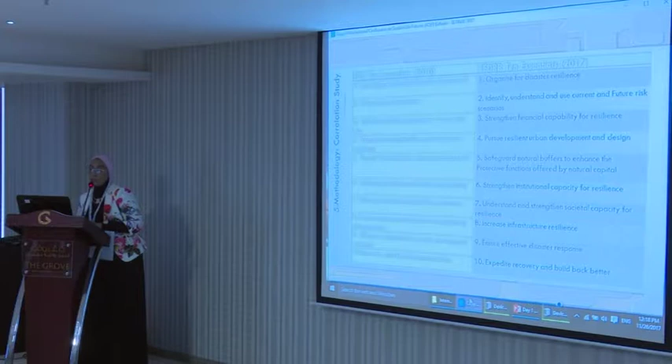From there, I set up a comparison between the new and the old ten essentials. There is no significant change, but there was a lot of emphasis on the use of technology in order to assess risk and develop sustainable futures for cities.

The research finding I acknowledged from those indicators is that this element of sustainability was missing. So once that element of sustainability is missing, that means the Sendai framework cannot achieve its global targets alone.

So building coherence between those global agreements, between Sendai, the SDGs, and the Habitat III New Urban Agenda, is the key element. Here I'm just highlighting one of the targets for SDG 11, which is focusing on reducing the losses, as I mentioned earlier.

And here are some of what we call the metadata, so the processes in order to assess those risks and develop the indicators on it.

I'll end up here with these definitions that I mentioned earlier around resilience: risk management, hazards, resilience, and climate change adaptation.

A very, very quick review here because my time is finishing, but I would say it's evident from the literature review that sustainable recovery from a natural hazard event ensures that existing risks are reduced and any new risks are managed. So the recovery cannot be done just by emergency response, but has to be long term.

Because people who are displaced now are living for long terms in shelters, living for long terms in informal settlements that are not accommodating their needs.

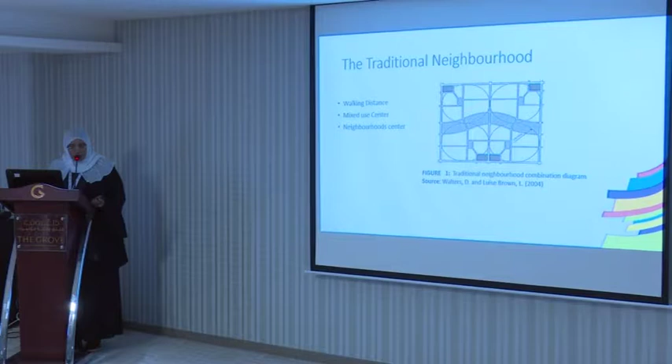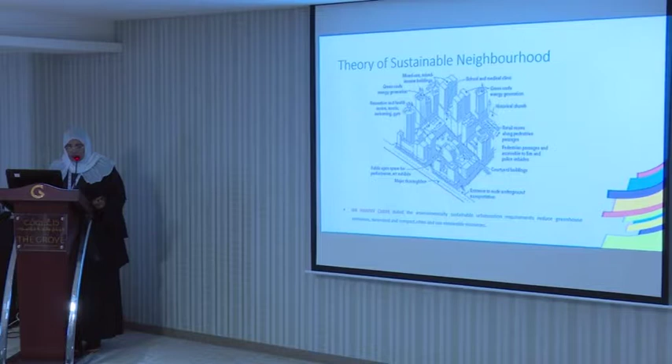Theory of sustainable neighborhood. This design shows us that we can use a green roof, and we can have pedestrian crossings and walkable streets for the neighbors. At the center, available services should include a historical church or mosque available in the neighborhood, retail stores, and everyday activities.

Sustainable cell: this neighborhood is near a farm, so everyday food can be taken from the farm and waste can be dumped there, creating a natural recycling system. The air, CO2, oxygen, and nitrogen can easily be impacted and recycled for the environment.

Focus in Khartoum city environmental factors. Khartoum faces four climates: rainy season and autumn, with precipitation percentages of 50 to 100 millimeters. In summer, the wind direction is north-south, and the temperature in summer ranges from 40 to 50 degrees centigrade, while in winter it ranges from 10 to 25.

Natural resources available in Khartoum: we have solar energy, wind energy, biomass energy, geothermal energy, as well as hydroelectric energy.

Political factors: Sudan has subscribed to several international agreements like Agenda 21 in 1992, and we have UN Habitat, UNEP, United Nations Development Programme, and UNFCCC.

Social factor: early studies showed that Khartoum faced serious environmental problems because of people migrating from south to east and west of Sudan, and this migration has doubled in the last 20 years, creating serious problems for Khartoum's services, education, hospitals, and other activities.

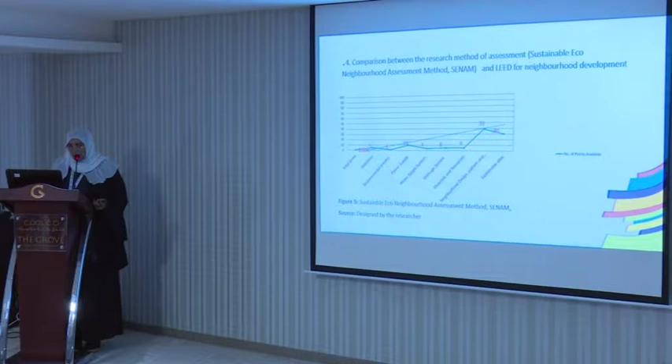What is the difference between the two systems? I'll give more details for power supply, water supply, drainage supply, materials and resources, and emissions and safety.

The system has a scale ranging between 0, meaning not applicable, +1 positive impact, +2 more positive impact, +3 the most positive impact, and -1 meaning negative impact to the environment.

Also, the system has an evaluation range: less than 35 is a weak result, between 35 to 44 is pass, 45 to 59 is good, from 60 to 75 is very good, and above 76 is excellent.

Focus on the main principles of sustainable sites, with a total of 30 points, and the main issue is smart location and controlling system: enhanced parking control, reduced automobile dependence, bicycle network, walkable streets, pollution control in construction activities, noise prevention, controlling natural water features, avoidance of the floodplain, improvement of the outdoor environment, heat island effect, enhanced landscape on site, public transportation access, maximized open space, and universal accessibility.

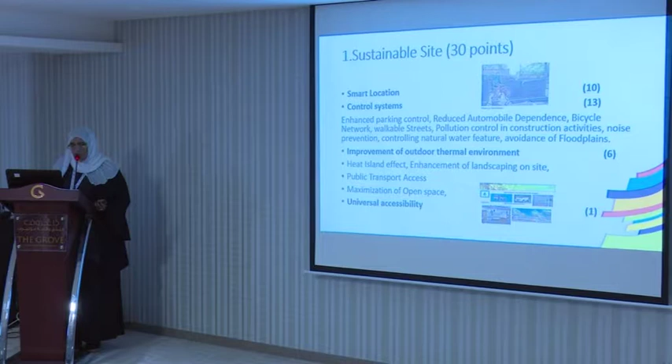Neighborhood design, pattern and construction: we have 3 focuses - design, neighborhood pattern, and construction. On design: certified green buildings, neighborhood strategies, affordable rental housing, building reuse and adaptive reuse, sustainable historical buildings, minimization of site disturbance through site design and site orientation, and local food production.

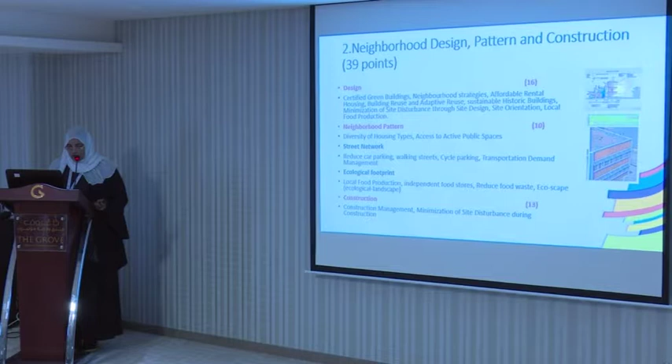On neighborhood pattern, we have diversity of housing type, access to active public space, street network, and ecological footprint. On construction, we have construction management and minimization of site disturbance during construction.

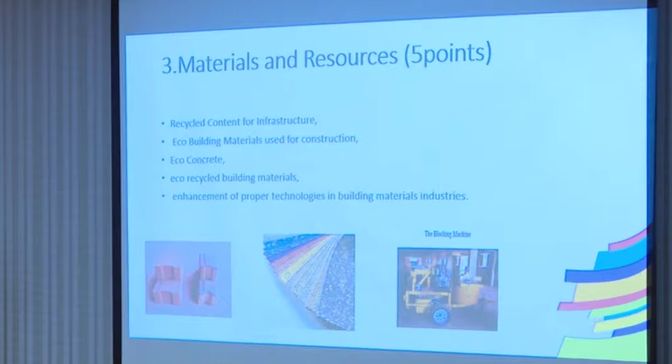This machine is already used in Greater Khartoum for eco buildings in Greater Khartoum. Recycling materials are also applied.

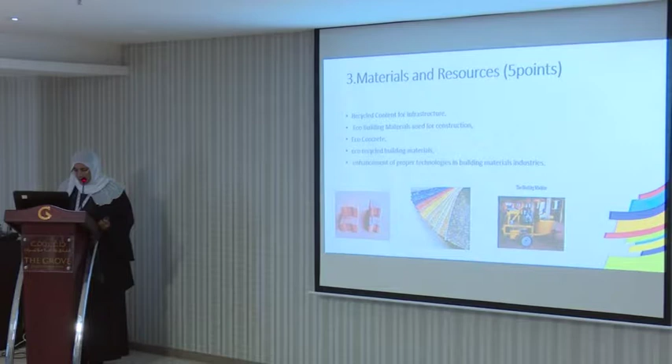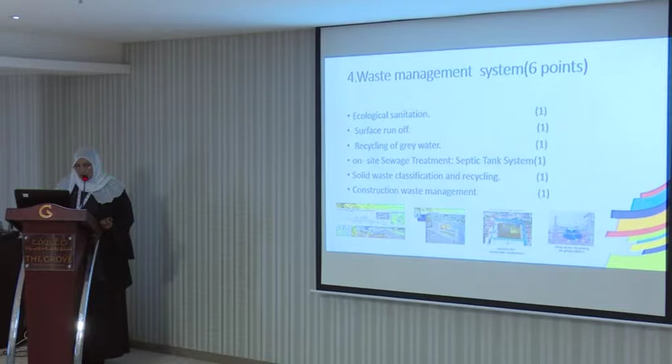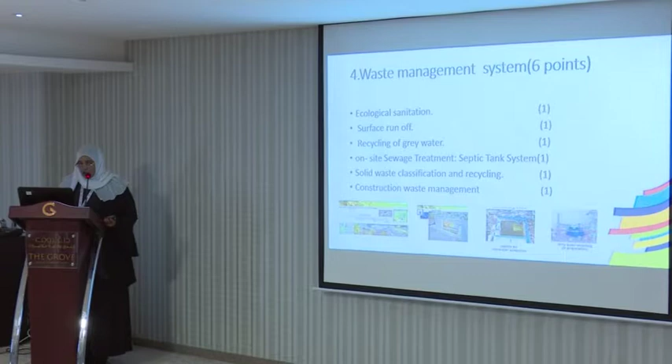Waste management system: we have ecological sanitation, surface runoff, recycling of grey water, on-site sewage treatment. In Khartoum we use about 70% septic tank and well, and 25% drainage net, plus solid waste classification and recycling and construction waste management.

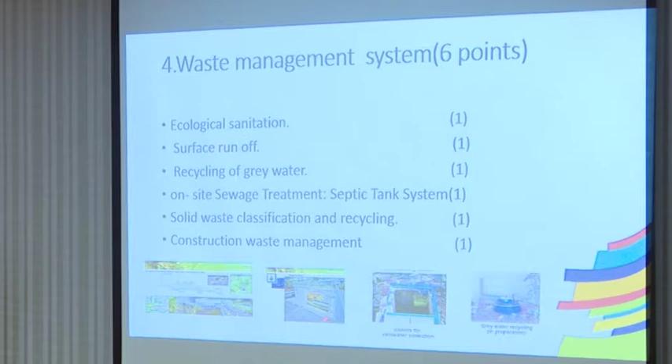These are some solutions that can be applied on the ecological neighborhood: we have a plant for the water system, surface runoff, grey water recycling, and waste management.

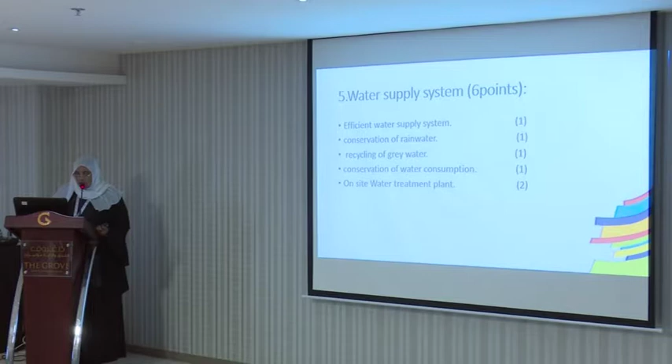Water supply system: efficient water supply system, conservation of rainwater, recycling of grey water, conservation of water consumption, and on-site water treatment plant. And power supply: we have energy sources.

Usually in Khartoum we have a national grid, and the main source is hydroelectric power, and its application.

During my PhD research, I found that only two case studies out of 48 case studies apply solar systems, such as solar heating and solar systems.

100% of housing in Khartoum applies a metering system, but we need to add a metering system for water. Also, some projects apply natural lighting while others do not.

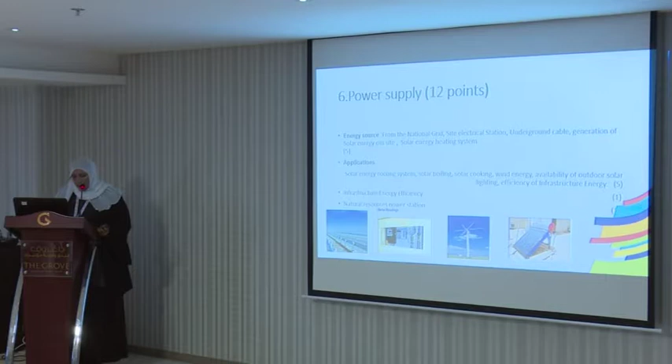Environmental plan process: we need to add teaching and learning environmental design process, focusing on sustainability in Khartoum during the design phase, construction phase, and maintenance phase.

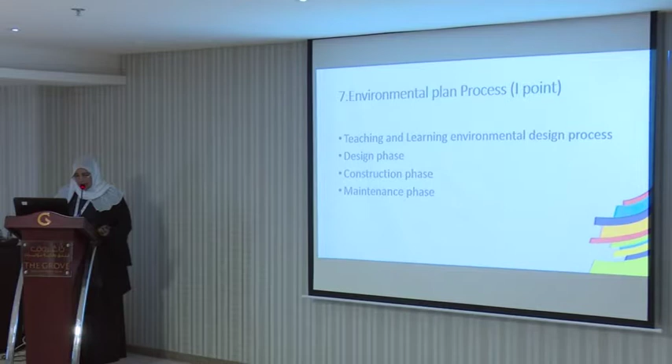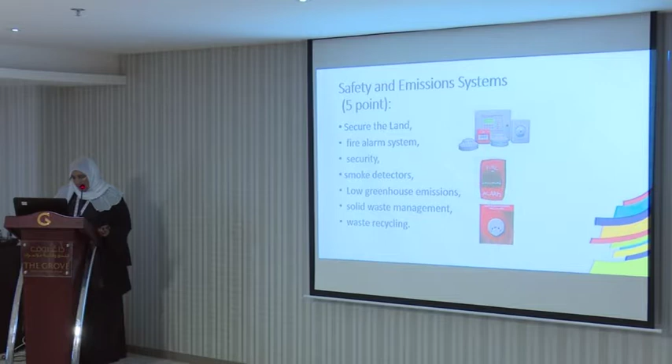Safety and emission procedures were added by researchers, and we need to apply safety procedures for the housing sector and the neighborhood. Secure the land, fire alarm system, security, smoke detectors, low greenhouse emissions, solid waste management, and waste recycling. Community participation was also added by the researcher.

In applying ecological neighborhood principles, we should involve the whole community sector: developers, agents, project manager, architects, planners, contractors, and owners, by discussing the researches and knowledge transfer.

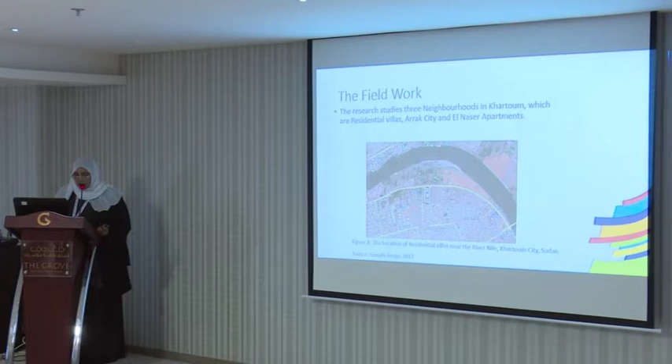The second location is Arrak City, near Madani Street. We have 4 types of villa: villa type A in this area, villa type B, villa type D, and villa type C. The neighborhood center is at the middle.

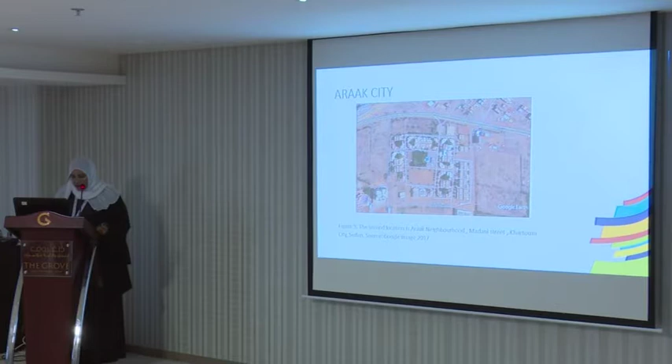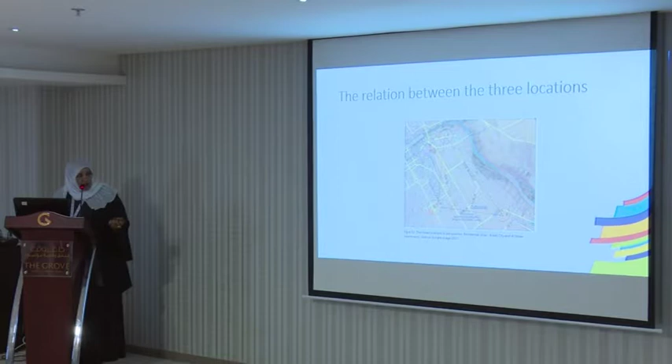And El Naser Apartments, the whole compound is about apartments, near Afra Mall at Khartoum City. The location is between the 3 neighborhoods: the residential villa, Arak City, and Nasr Apartment.

The result between the 3 neighborhoods, this is the result in detail, and this is the main principle of sustainable neighborhood: sustainable site, neighborhood design pattern, material, water and waste management, power supply, health, safety and emissions, and community participation.

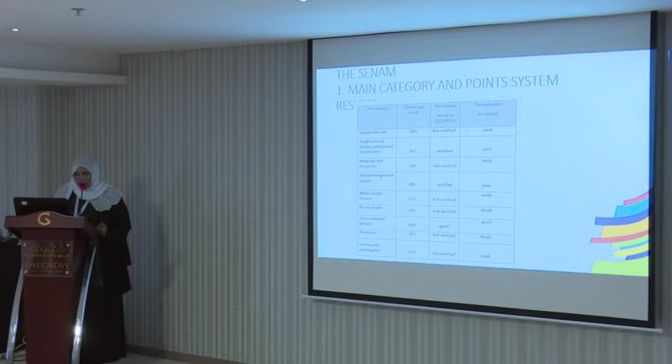Residential villa, Arak City, and Nasr Apartments, and this is the average result recorded for Greater Khartoum: sustainable site 30%, neighborhood design pattern and construction 40%, materials and resources 20%, waste management system 40%, water supply system 27%, power supply 20%, environmental design process 60%, emissions 33%, and community participation 27%.

Discussion of the results shows the residential villa result is 38. Positive points include the design of the site itself, plants and trees, parking control for the indoor environment, and most villas are oriented in the right direction. Outdoor thermal control through plantation and civic areas is good. It provides high technology, wireless equipment, and a communication system. Water plant is available, and energy comes from the national grid.

The negative point is the building form, which is only linear, and we have only one type for the whole site. This is the location for the residential villa.

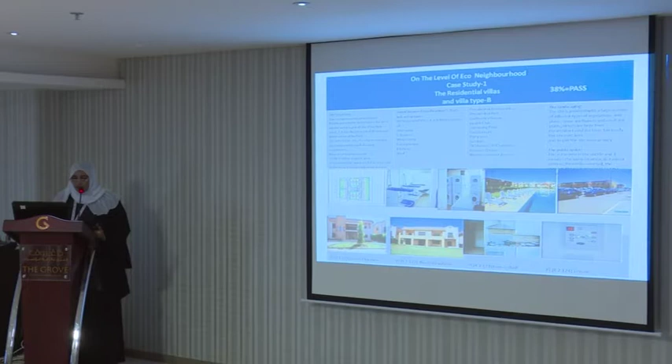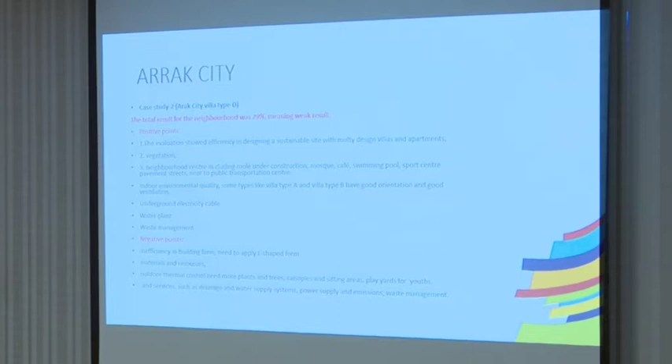Then we have Arak City. The good points show efficiency in designing the sustainable site and neighborhood center, with most everyday activities covered. The negative points are inefficiency in building form, materials and resources, and the outdoor environment, which is not well planted. Several services are missing, like a club for youth and a shopping mall. This is the location for Arak City.

Then we have Nasr Apartment. The most positive point is the good design of the building itself. The negative point is that they don't have any trees and plantation on the site, and they don't have any club for the youth.

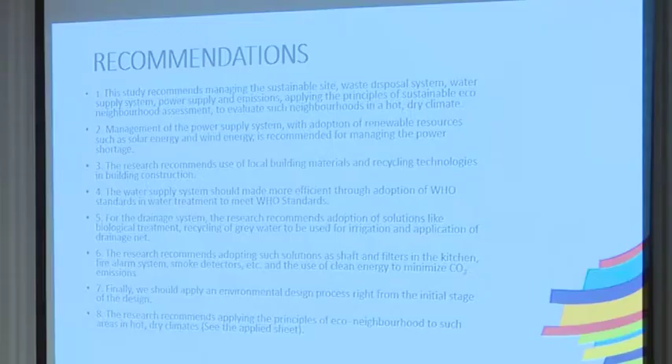In conclusion, residential villa scored 38, a pass result; Arak City scored 29, a weak result; and Nasr Apartment scored 59, a good result.

Recommendation, recorded for the sustainable neighborhood in Greater Khartoum: the study recommends managing sustainable site waste disposal, water supply system, power supply, and emissions, applying principles of sustainable eco-neighborhood and management of power supply system. The research also recommends use of local building material.

The water supply system should be more efficient, and for the drainage system we have to make a drainage net. The research recommends adopting solutions such as shaft filters, and for the kitchen, a fire alarm system and smoke detectors and other safety procedures. Finally, we should apply the environmental design process for the whole design process. The research recommends applying the principles of eco-neighborhoods in Greater Khartoum.

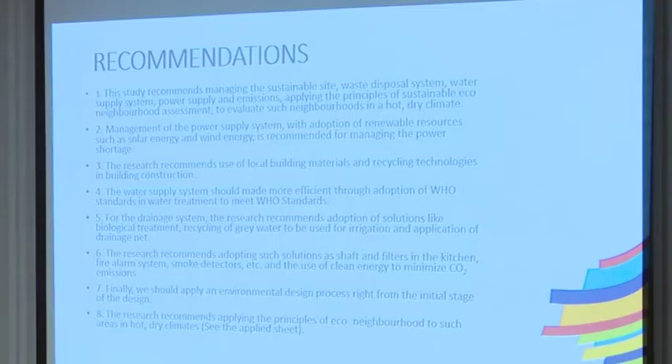Going to just take the privilege and the bias of knowing the case studies that you have talked about. Is there anything that you highlighted on the formal construction, let's say, development that we have this time? But in terms of relating to sustainability, because we do also have more of informal, or I would say community-based elements of design and construction, especially that Khartoum is now more of a hub that is bringing migrants and intelligence-based population from all over Sudan, so we have a huge diversity of the background and the knowledge that the people bring in.

So did your research, apart from the formal ones that we have, look into informal settlements? My design is focused on sustainable neighborhood in Greater Khartoum, so I took only 3 neighborhoods in Greater Khartoum and made a survey with the people living there to identify the main problems facing these compounds.

And for the residential villa, they are facing a problem of surface runoff. And the site was highly equipped by the government for presidents of Africa for a specific conference at that time.

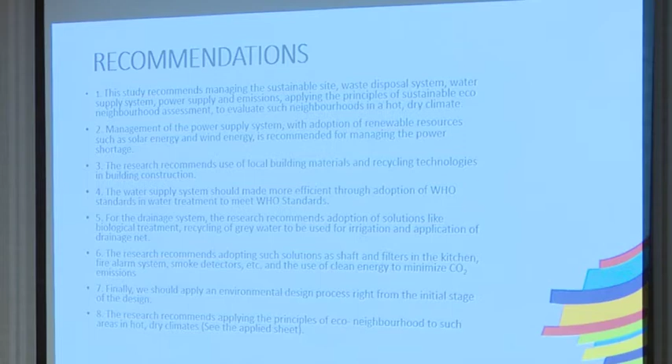Assalamu alaikum wa rahmatullah. My name is Ihab. Today we are going to talk about linking between sustainability development and facility management.

As we know, the existing building stock has increased very high for the last few years. When we discuss the result, we have around 70% operational buildings running, handed over, and the end users are using. That's why the facility management profession has been growing rapidly during the last few years.

On the other hand, sustainability development requirements have increased due to consumption needs and future generations. So the aim of this study is to incorporate sustainable practices into FM to manage existing buildings.

The specific objective is to develop a sustainability framework that can be implemented in operational buildings, respecting the 3 pillars of sustainability: economy, society, and environment.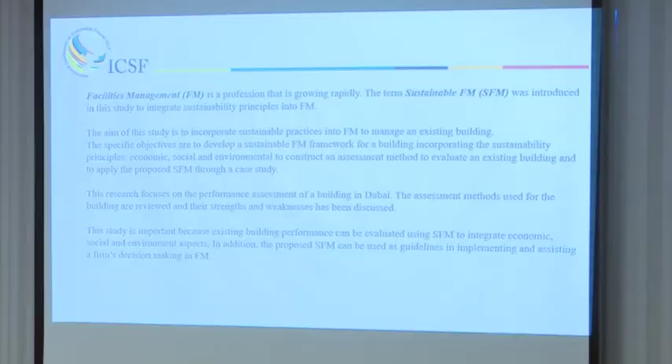Also, the unique aspect of this study is to define the way to assess existing buildings. All of us focus on green regulation, green building during construction, but there is very little certification focused on assessment for operational buildings. That's why today we highlight how important this is and how it can improve our life for future generations.

Sustainable facility management, or facility management and sustainability development, is a very big topic. So this research is not going to focus on the details of facility management or sustainability development, but will discuss the relation and how we integrate facility management with sustainability development.

The research has been built so that during the literature review, we discuss the definition and scope of facility management, plus the definition and scope of sustainable development, and how we integrate them.

On the other hand, we conducted a questionnaire survey focused on defining the baseline - where we are, what we have in existing buildings. We have buildings built 20, 30 years ago in a traditional way. So in order to convert those buildings to green buildings respecting sustainability pillars, we have to understand our baseline to propose such a framework.

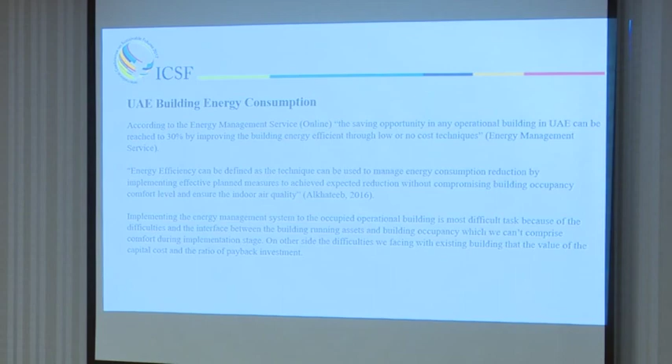As I mentioned, the number of existing buildings has increased a lot in recent years, and within the coming years, the number is going to almost double. That's why we are looking for organizations to take the lead and ensure operational buildings become green. There are a lot of buildings.